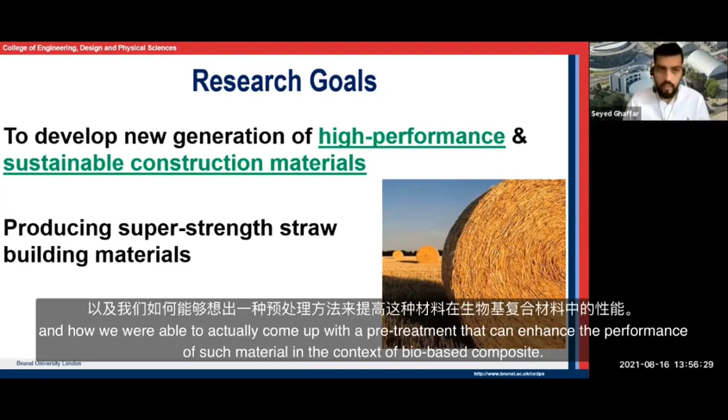A lot of, for example, wheat straw after the harvest of the grain gets left on the field, and after a while it's burnt, which obviously results in a lot of CO2 emissions. What we have done in this project is we have proposed to use the stem of wheat straw for construction materials. I will go into the details of how we managed to utilize such materials and how we were able to come up with a pre-treatment that can enhance the performance of such material in the context of bio-based composites.

So these are just some of my main motivations. Of course this is known to everyone - these are the headlines that actually showcase the significance of my research efforts. We have high global demands for energy, unstable and uncertain petroleum sources, concerns over climate change, of course global warming. With the latest reports we saw last week, there are many pressing issues, and it is now past the emergency - everybody needs to play their part in changing their attitude and hopefully coming up with a mitigation plan to the concerns and changes to the climate that we are experiencing now. Obviously the main underpinning reason for all of these challenges is overpopulation and the lack of control that we've had throughout the past centuries.

That then leads to air pollution. With globalization and overpopulation, we are using a lot of our natural resources, so we have a crisis there. At the same time, we are producing an excessive amount of waste, whether that's coming from municipal solid waste or from our industry, construction and demolition waste. So these are just some of the main headlines showing the motivation for such research, and why we need to move towards investing time and research in utilizing our natural resources, and how we can go back and help construct with them.

I want to give an example of what we did back in 2013 on a project called Grow2Build - this was 6 years ago now. This project was funded by ERDF, the European Regional Development Fund, and we were basically focusing on the transition of the Northwest European economy from an oil-based economy towards a bio-based economy. How can we encourage, for example, more farmers to grow hemp and flax and wheat straw, and show them that there is a way of making a building product out of these crops.

We tried to tackle the whole supply chain in this project, from the farmers all the way to the processing partners, the stakeholders, composite making partners - the companies using these fibers and putting them in the form of a building block, for instance - and how we can make sure that they are talking to each other, communicating their needs and requirements, so that we can have a perfect solution to transition the European economy from an oil-based to a bio-based economy.

And I have to say that it was a successful project. We are looking to expand on the outcomes, and we have expanded on what we learned during that project.

We had 11 European partners from Northwest European countries, the likes of Netherlands, Belgium, France, and obviously a couple of partners in the United Kingdom where we are from and I am from. So at Brunel, my university, we were actually in charge of dissemination of such knowledge, and we were also in charge of technical development of these bio-based building products.

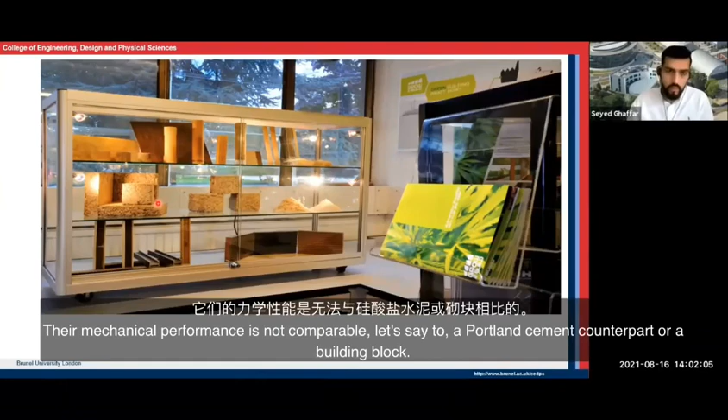...comparable, let's say, to obviously a Portland cement counterpart or building block. But of course, we can reinforce them. We can use them for non-load bearing applications.

And here, for instance, you are looking at another product that we developed called WPC, wood plastic composite. The wood waste is from furniture.

And we also used polymers that have been recycled, the likes of PP, polypropylene, polyethylene, and some recycled PVC, polyvinyl chloride. This darker color here has some waste tire rubber, so shredded tire rubber.

We used this in a process called extrusion at high temperatures, 190 to 200 degrees Celsius. The profiles that you can see here can be used for decking, external decking.

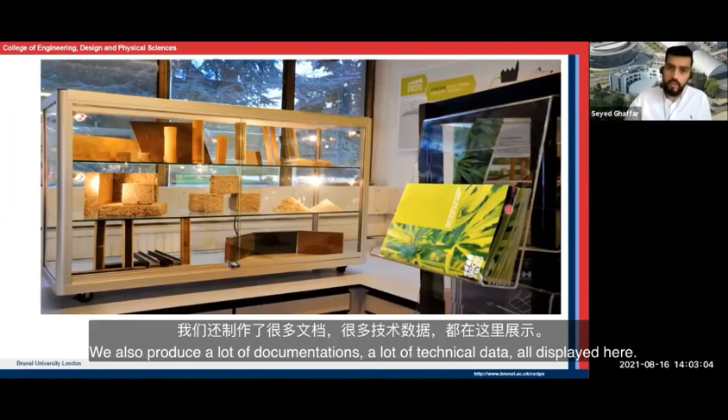We also produce a lot of documentation, a lot of technical data displayed here. We display them for all the small and medium enterprises, all the architects who are willing to learn more about these options and alternative solutions.

They come into us, to our European Center of Excellence, and we exchange our knowledge, and we tend to do a lot of consultations on their request and on their product developments.

We also tend to have a lot of conferences and workshops where we meet technical directors of different companies who are interested in investing in bio-based building products.

We also have a lot of raw materials on display. These are some hemp chips, flax fibers, wheat straw, and we have all the technical specifications and characteristics of these fibers.

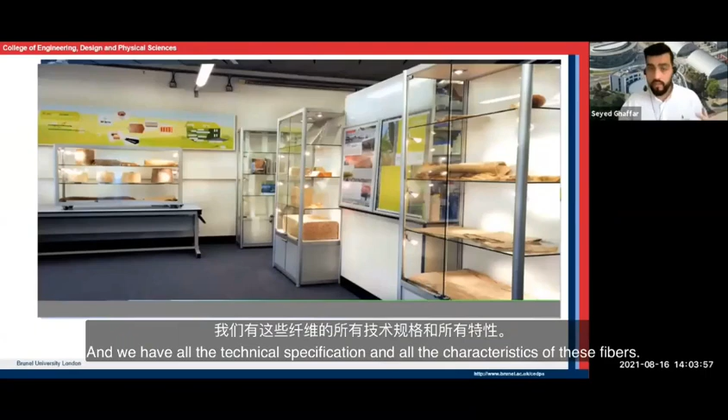Things like chemical composition, mechanical strength, and all the important critical parameters that somebody trying to develop a product needs to know before they design a formulation, and after testing, achieve the required performance and properties.

So for example, you are looking at hemp chips. Different types of hemp chips are available at Grow2Build in our European Center of Excellence, and as I said, we have all their technical specifications.

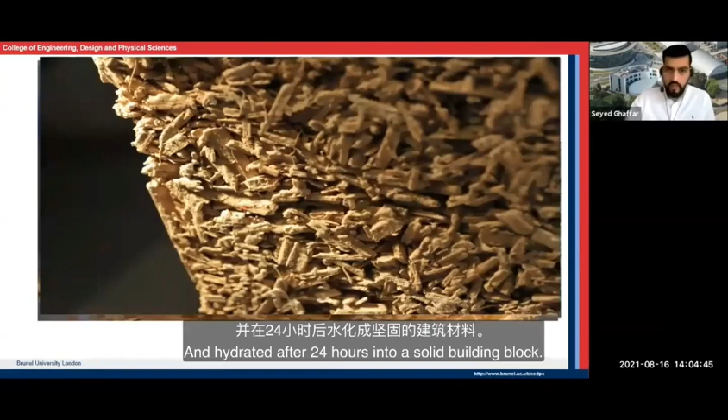Again, this is another close-up of a hemp chip. This is a picture of hempcrete, the hemp chip that has been combined and mixed with lime, and hydrated after 24 hours into a solid building block.

Some straws, wheat straws in this case, which is obviously the main topic of today. We looked at the material science of wheat straw and how we can identify the good parts within these stems.

These good parts are useful for withstanding high structural loads in a context of bio-based composite. You can see some other examples of the products that we have developed.

So let's go to discuss the wheat straw composite, which is really the main topic of today's session. If you're interested, I will make all these presentations as slides available to you, so you can read what my group has done already around this topic.

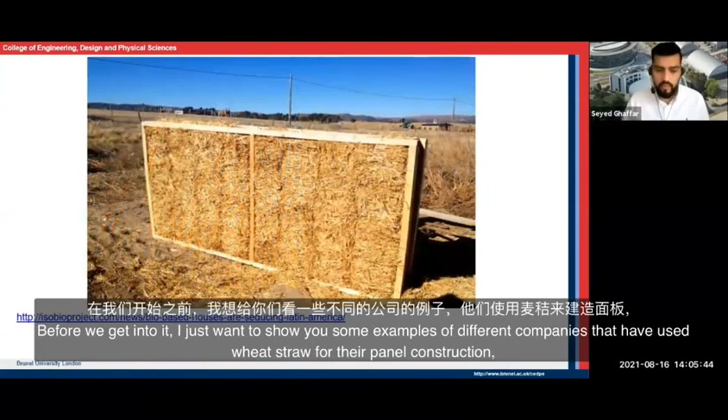Before we get into it, I just want to show you some examples of different companies that have used wheat straw for their panel construction.

But one thing that I want you to realize is that they do not use any pre-treatment, they do not use any material science. They just get the wheat straw with minimum processing, without any separation, without any cleaning.

Without any purification, they just use it in a cassette, as you can see in the picture, and they put it in use. Obviously, their durability then is an issue.

Their mechanical performance is another issue. But this is how they utilize wheat straw without any pre-treatments, without any optimization.

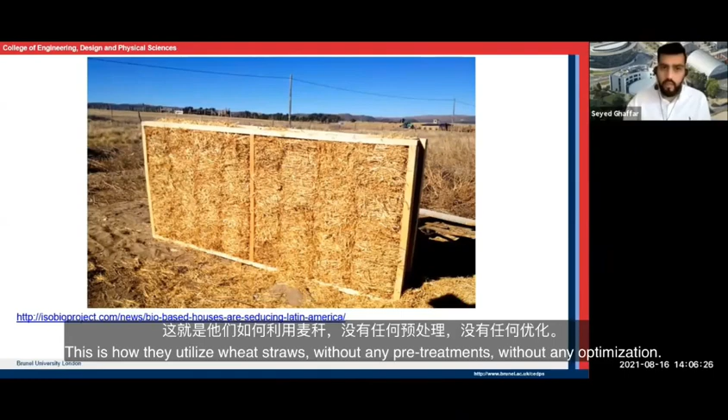And I will tell you why this is wrong, and why this will not be a good solution in the long term and at a large scale. These are only one or two examples of the projects that they have done, and it might not be suitable or feasible for industrial upscaling.

So you can see some more pictures here of this company. The link is here, and the company is called EcoPanel. And this is their information. They are based in Czech Republic.

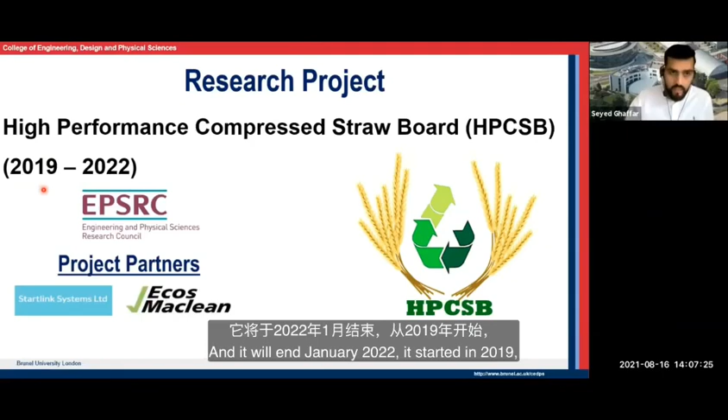So a little bit more about my project, high performance compressed straw boards. We got sponsorship from EPSRC, the Engineering and Physical Sciences Research Council. I have two industrial partners on this project, and it will end January 2022. It started in 2019. So today I will talk to you about the outcomes of what we have found out from this investment, from this project.

The main focus is on biorefinery of wheat straw. The process of biorefinery is sustainable processing of straw biomass into a spectrum of marketable products and energy, such as heat, power, fuels, chemicals, and also some materials and products that we can extract from this straw biomass. So there needs to be a biorefinery process: a pre-treatment stage, then processing and optimization before we can achieve an array of different products and energies useful for our sustainable development.

So the target is on low volume, high value products, in addition to high volume, low value products like bioethanol, which is a fairly established area of research and development. It has already been developed, and they have very high TRLs, technology readiness levels are quite high. And I know a lot of companies who are actually using bioethanol coming from straw biomass or from wood.

So our target was on materials, and how we can get from straw biomass, through a biorefinery process, a material that can be served for the construction industry.

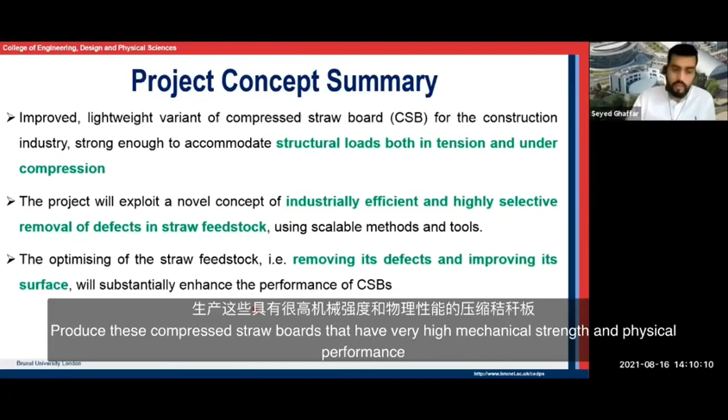And once we have done the optimization, once we have such a removing mechanism of defects, we can improve the surface quality of the straw, because when it comes to biocomposite, I explained why the surface is such an important element for achieving high mechanical strength. So these are what we are trying to target, what we have tried to achieve, and I am pleased to say that we are now able to produce these compressed straw boards that have very high mechanical strength and physical performance. Their water absorption, for instance, is very good, and it passes all the different types of standards.

This is the project concept diagram. We are looking at a modular system, so we want to focus on small scale modular blocks for prefabricated construction.

The company, the project partner who is contributing to this project, is giving us their truss. You can see in the presentation that the company name is Startlink, and they have developed these types of trusses that our compressed straw board, our panels, will actually fit in the middle of. These will help us to have higher mechanical strength, especially in tension.

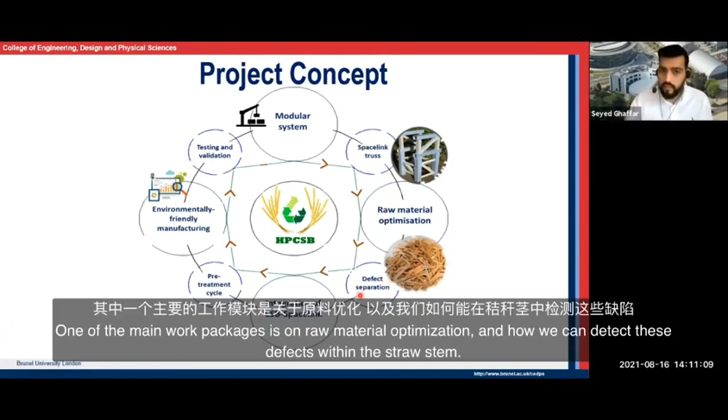One of the main work packages is on raw material optimization and how we can detect these defects within the straw stem. Then we integrate the compressed straw board with the SpaceLink solution. The pre-treatment cycle is extremely important, and we have to adopt a strategy which is environmentally friendly. And after that is comprehensive testing and validation of our solution.

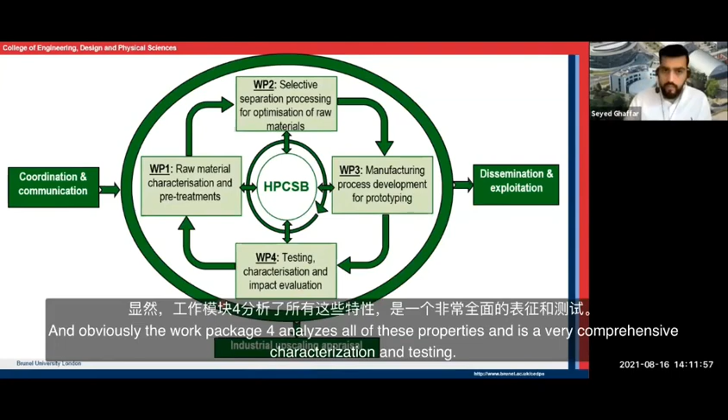This diagram here shows the details of the work packages. It starts from raw material characterization. Then the outcome of this work package was fed into work package 2, which is selective separation and processing for the optimization of the materials. Then work package 3 looks at manufacturing process development for prototyping. And obviously the work package 4 analyzes all of these properties, a very comprehensive characterization and testing, in order to evaluate the impact and see if we can produce the system and solution on an industrially feasible scale.

So we wanted to use eco-sustainable strategies. We knew that the wheat straw as it comes is not strong enough. It needs some type of pretreatment, and our pretreatment is a combination of physical methods, very mild physical methods. We do not use any chemical pretreatments, and we do not use any coupling agents.

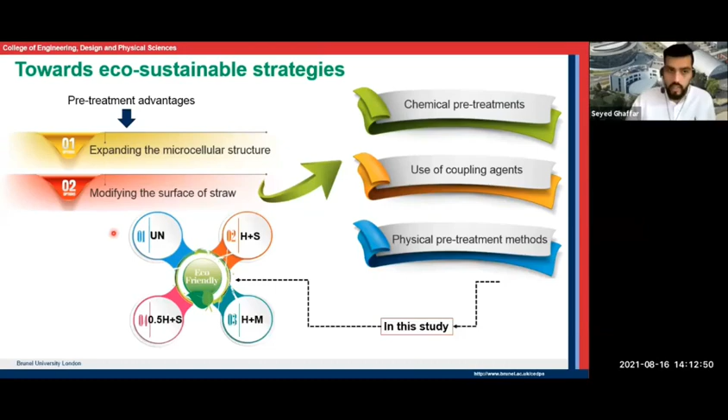We just use a couple of pretreatments, a combination of physical pretreatments such as hot water washing, steam pretreatment, and for the reasons of comparison, we also use microwave and hot water. UN here stands for untreated straw. So we wanted to get the full picture of what happens to this straw once it is undergoing these different types of physical pretreatments, for us to find out if we can actually enhance the performance of these straws compared to an untreated sample, untreated wheat straw as received from the farm.

So we had to look at the wheat straw in detail. So this is the wheat straw stem. Obviously the grain goes for food purposes. Then you are left with a stem, and the stem has two different main components. One of them is called internode, and the other one is called nodes. So here you can look at the nodes. This is as received from the farm.

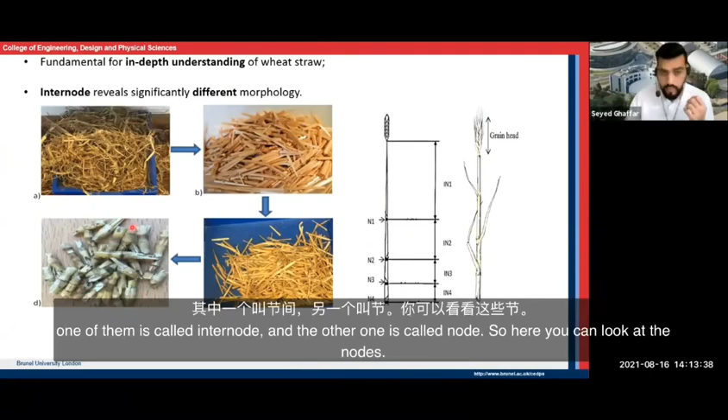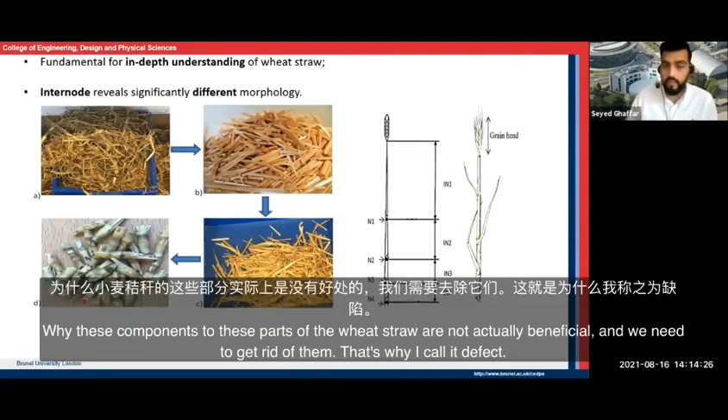Then we cleaned all the straw biomass. We got rid of all the leaves, and we were left with a stem. The stem is this part here. Then the next stage, we separated the internode from the nodes. So the nodes are the joints, they act as a joint in the column. In the context of biocomposite, we later found out that they are a defect. They are potential routes for cracks in composite once they are under loading. I will prove it to you within the next few slides, why these parts of the wheat straw are not actually beneficial, and we need to get rid of them. That's why I call it a defect.

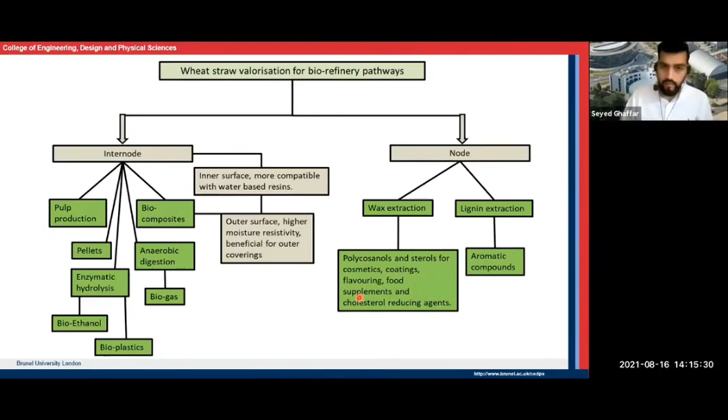But nodes, on the other hand, have their own applications. They can be used for lignin extraction and for wax extraction, which can be used as cholesterol reducing agents, flavorings, food supplements, and even cosmetics. And because the node has a higher content of lignin, we can use these nodes for lignin extraction and aromatic compounds, chemical compounds that have their own application.

But one thing I want to emphasize here is that we should not use the whole wheat straw as it comes from the farm. There needs to be a separation. There needs to be a careful characterization between node and internode and what they could be used for. This is a smart way of biorefinery.

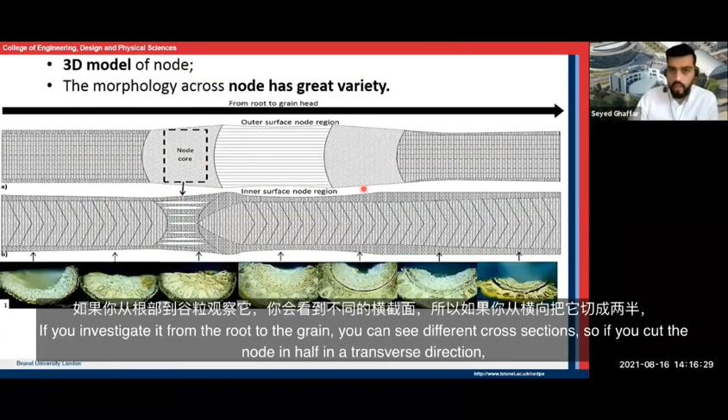So in our study, we looked at the morphology and how the different parts of the straw are different. So this is node in transverse direction. If you investigate it from the root to the grain, you can see different cross sections. If you cut the node in half in a transverse direction, the morphology of the cross section actually changes. You can see it is initially hollow, then it becomes dense, it becomes very completely filled up, and then you have a very dense core material here at the center of the node.

And then later on is the initiation of the upper internode, which is again hollow and doesn't have any dense areas. I can show you in the next picture here. So you are looking at the cross-section of internode, and you can see it only has one layer of epidermis, parenchyma, and vascular bundles, and is generally hollow. It has a hollow structure.

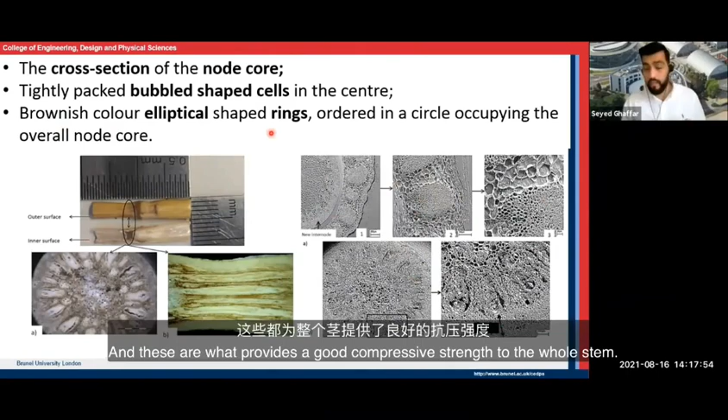Again, here it compares the cross sections of nodes in transverse direction. So this is the whole node area, cut in the middle in a transverse direction. You have the inner surface and the outer surface, and these are the optical microscopy images showing the cross section of the node area. And these are some scanning electron microscopy images of the different parts of the node, which is characterized by brownish colored elliptical shaped rings, and these are what provide good compressive strength to the whole stem.

I also looked at the chemical functional groups on the surface in order to understand the chemistry of wheat straw. We looked at FTIR, so what type of chemical agents or chemical characteristics we have on the node and internode. We found out that wax is an important element on the outer surface, and wax is a hydrophobic element.

So if you want to use wheat straw in a context of biocomposite, you need to have a surface that can allow the resin to penetrate inside. But we have an extensive amount of wax on the surface, which diminishes the penetration of resin into the stem. So therefore, we will have a very low mechanical strength. We will have a very low wettability, which is an important element when it comes to biocomposite production.

We also had a lot of silicon oxide and silicon carbide in different wavelengths on the outer surface of node and internode, and they are also characteristics of lignin and other chemical components of wheat straw.

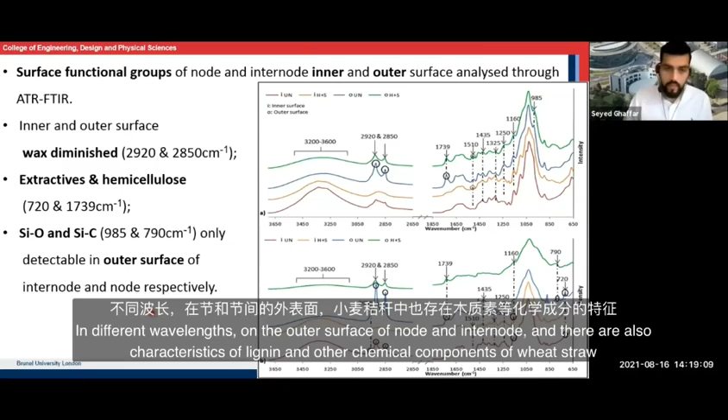We compared the morphology of node and internode, and epidermis, which is on the outer surface, contains the most amount of wax. And as I showed you, the wax has its own application, but in the context of biocomposite it is actually a defect. We do not wish to have any wax on the outer surface because it inhibits a strong interfacial bonding with the resin system.

So you can see that the epidermis is a lot thicker in the node, and that's one of the reasons why we have to separate the node from internode, because the node in a context of biocomposite acts as a defect.

Excuse me. And we also looked at the tensile test of single straw strands for node and internode. We tested untreated straw, and you can see that the tensile strength for internode is around 66 MPa with a coefficient of variance of 10%. The H plus S, which is 30 minutes of hot water washing plus 30 minutes of a steam pretreatment, actually improves the tensile strength, from 66 MPa to 88.9 MPa for the case of internode. So these are the internodes.

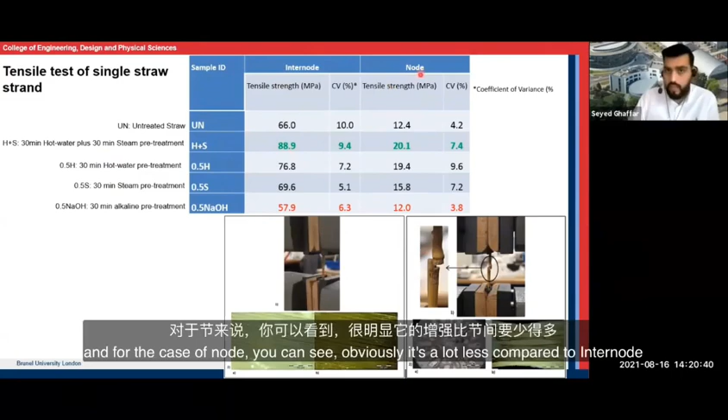And for the case of node, you can see obviously it is a lot less compared to internode. And again, another additional reason why the node is a defect in the context of biocomposite. We cannot have such huge differences in a raw material for biocomposite production. All of the materials that go into the biocomposite need to have high tensile strength, which is one of the most important properties for a raw material that goes into biocomposite application.

So again, another additional reason why the nodes have to be separated and removed before we produce the biocomposites. You can see all the different results for different pretreatments. And when you compare them to internode, you can see that they are significantly lower. The nodes are not supposed to provide that tensile strength.

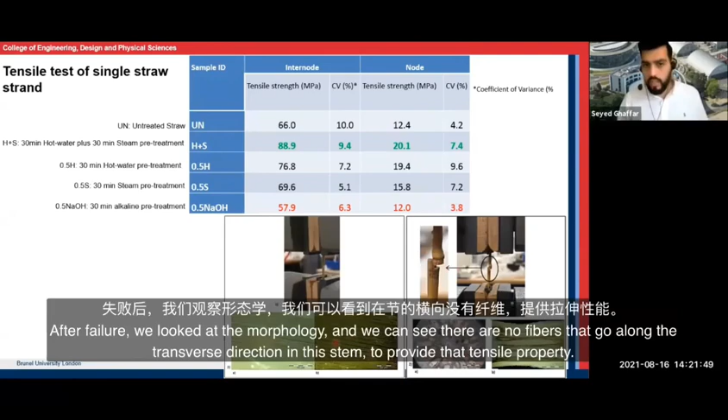You can see here that after failure, we looked at the morphology of the node, and we can see there are no fibers that go along the transverse direction in the stem to provide that tensile property. This is an optical microscopy that shows a lot of microfibers that are situated longitudinally within the internode. And this is the reason why we have such a high tensile strength in the internode, because we have these microfibers that are present.

But the node morphology does not have any fibers, so they are not supposed to be strong in tension. They are supposed to be strong in compression. So for the context of biocomposite, we need to remove these elements because they have very low tensile strength.

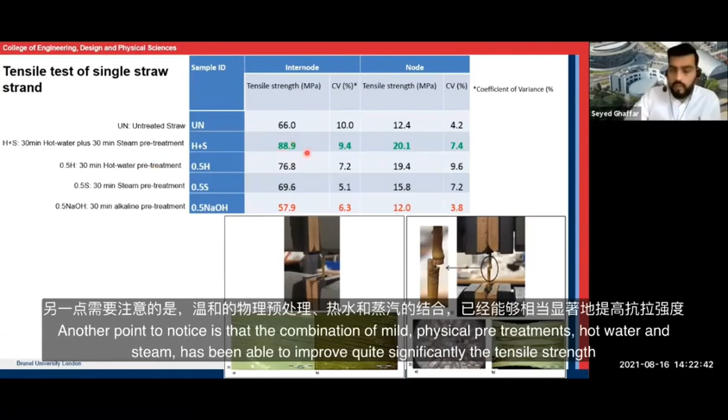Another point to notice here is that the combination of mild physical pretreatments, hot water and steam, has been able to improve quite significantly the tensile strength. Half an hour of hot water pretreatment on its own does increase the tensile strength, from 66 to 76, but it's not as effective as when that treatment is combined with steam treatment. The steam treatment on its own cannot really achieve a good improvement, from 66 to 69, which is not significant at all.

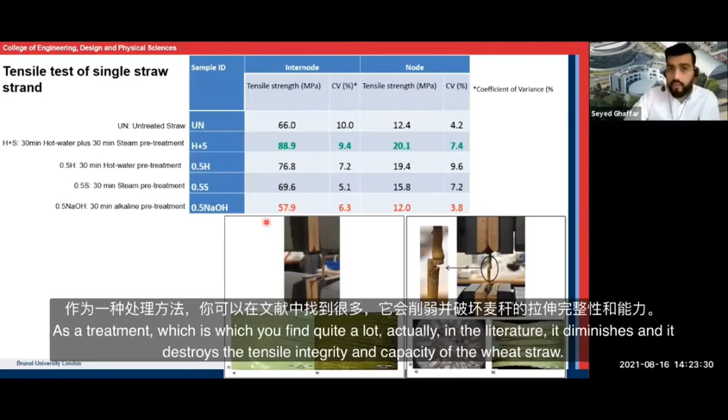Another interesting finding was that the bleaching or sodium hydroxide treatment, which you find quite a lot in the literature, destroys the tensile integrity and capacity of the wheat straw, from 66 untreated to 57.9. So we also proved that the chemical pretreatments that are quite usual within this research area, especially for the pulp and paper industry, are not effective at all when it comes to biocomposite production.

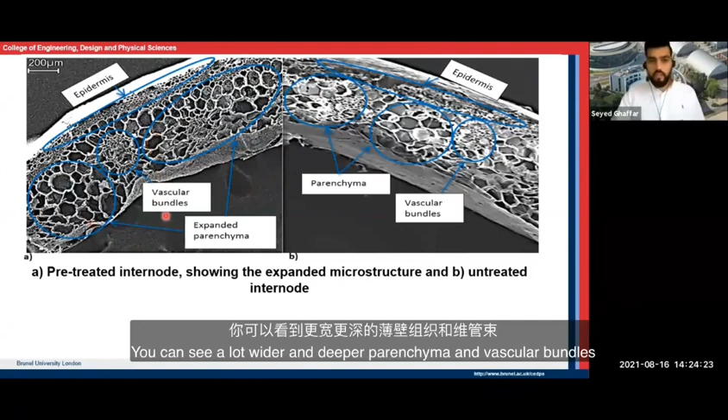So you can see here that the steam treatment swells the cell wall and creates microsites for penetration of resin. And here you can see the comparison between a pre-treated sample cross-section and an untreated sample. You can see a lot wider and deeper parenchyma and vascular bundles, which basically means once the resin is added to the system, the resin can easily penetrate deeper inside the structure of wheat straw.

Therefore, upon solidification, once you produce the biocomposite, once it is solidified, you have a lot higher mechanical entanglement between each particle, between each wheat straw. Whereas in the case of untreated, you can see that the situation is quite different. They are still very tightly packed together. The parenchyma or the vascular bundles, they do not really show that depth within themselves.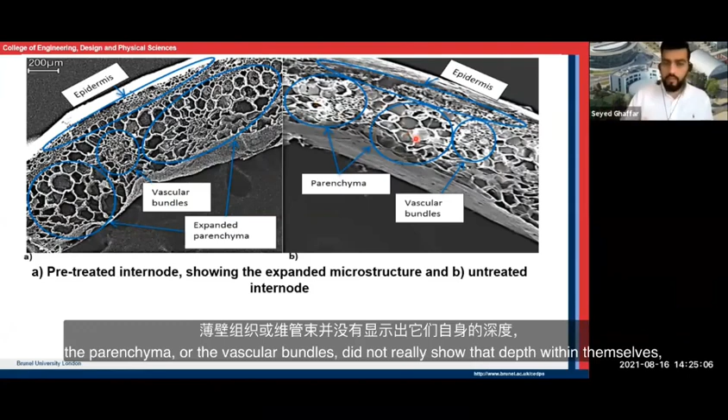So the pre-treatment is quite effective in opening up the pores and expanding them so that they are ready to receive the resin and to absorb the resin. So therefore we can produce high strength biocomposites.

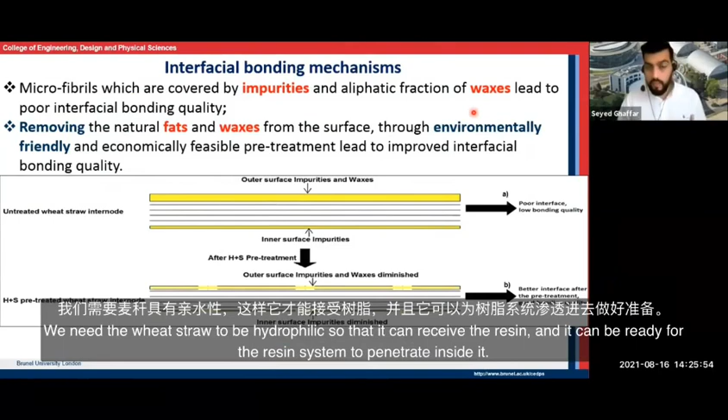Now, moving on to the interfacial bonding mechanism. So far we just looked at the cross section, the microstructure, but what about the surface of wheat straw? The surface of wheat straw is also quite important. We need to get rid of all the impurities and the waxes because wax is a hydrophobic element. We need the straw to be hydrophilic so that it can receive the resin and it can be ready for the resin system to penetrate inside it.

So through our pre-treatment, which was hot water followed by steam, we were able to firstly diminish the layers of wax, clean it from all the impurities, all the natural fats, and also open up some pores for the resin system to penetrate inside. This type of straw raw material is perfect for better interfacial performance and interfacial bonding quality compared to the untreated one. So this is an untreated straw which has a high amount of impurities and waxes on the outer surface. But after the pre-treatment, we have been able to remove and diminish the wax and also open up some micro sites on the surface so that the resin can easily penetrate inside.

We also did some testing on a small scale to look at the failure mechanism. You can see here in figure A, the failure that we call adhesive failure. So there are two wheat straw systems that have been glued together using lignin-based adhesive, a thermoset resin. This type of bonding usually has very low mechanical strength because the failure has happened between the resin and the substrate. Then we have B, which we call the cohesive failure. So the failure has happened within the resin system. But there is a good bonding between the resin itself and the substrate, the wheat straw. You can see here some of the wheat straw component is still intact with the resin.

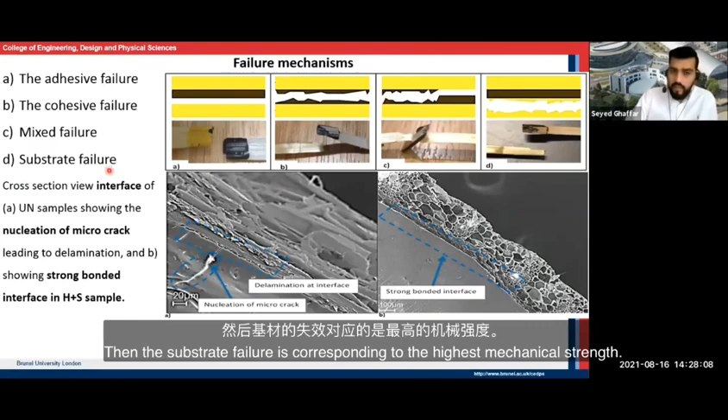Then we have C, which is a mixed failure. So you have adhesive failure at the beginning here. Then you have the cohesive failure, within the matrix system, within the resin system. Then the substrate failure corresponds to the highest mechanical strength. Why? Because the interface between the resin and the straw is so strong that the failure has happened within the wheat straw itself. So there is a lot higher stress required to break this sample, and therefore we have higher mechanical strength.

So when does this type of failure happen? In the case of pre-treated straw. When we wash the straw for half an hour with hot water and then we dry it for another half an hour using high pressure steam. That's when we have very good interfacial bonding.

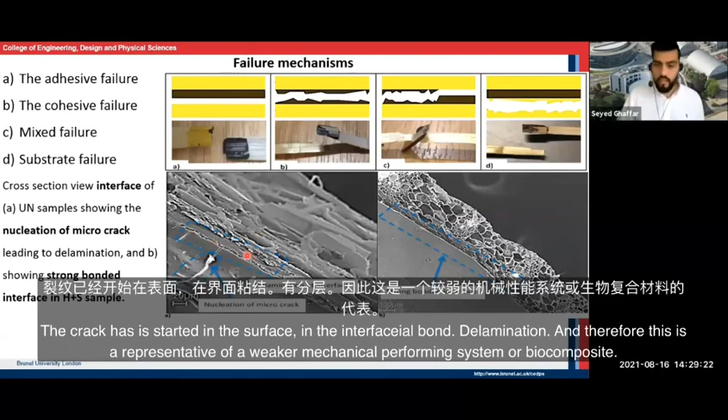And you can see here microstructure analysis, the SEM images that show the interface between the wheat straw and the resin. No delamination at all in the surface and very good intimate bonding. This figure here, on the other hand, is showing the untreated wheat straw and the resin system. So you can see the crack has started in the surface and the interfacial bond, delamination, and therefore this is representative of a weaker mechanical performing biocomposite.

Again, here are some more images that show the failure of a high strength biocomposite. So for the straw that has been pre-treated, we have evidence after the failure. We looked at the microstructure, and we have evidence of resin penetrating inside the microstructure, inside the parenchyma and the expanded cells. And you can look at the optical microscopy images.

They are useful because obviously they are in color, and you can see that the darker brownish resin, thermoset resin, has fully penetrated inside the cells of wheat straw. So the yellow component here is obviously wheat straw, and the darker component is the resin system. And in a closer look, you can see that the resin has been able to fully penetrate inside the straw.

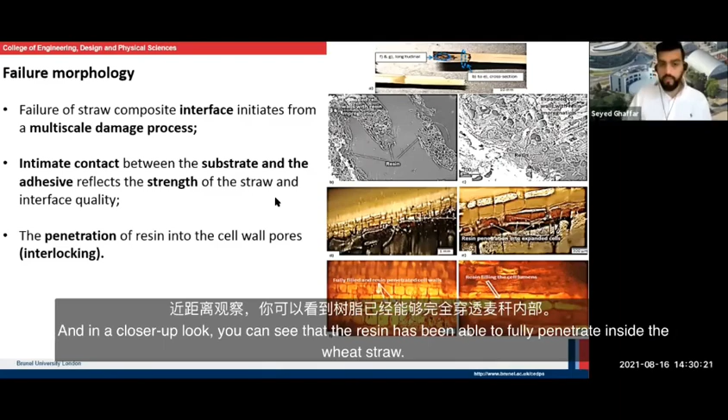So here I have another study to present to you based on our project. We looked at the bio-based polylactic acid composites. We wanted to come up with a way of improving the mechanical strength. So if you're interested, you can read the whole paper, but I just show you the main results here. We used hot press in order to make our sample.

So we combined PLA pellets, which is polylactic acid, with shredded wheat straw. And we hot press it at high temperatures for around 10 minutes, and we use a temperature of 185 to 190. We cut the strips of sample for tensile performance assessments. And you can see the results here.

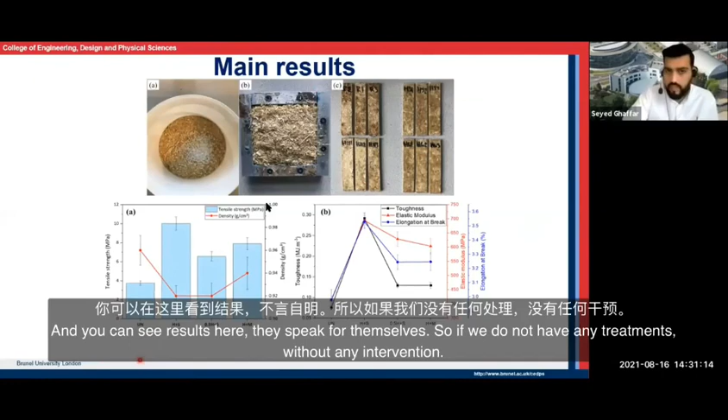They speak for themselves. So if we do not have any treatment, without any intervention, we use the wheat straw as received from the farm, and we make the composite out of it. You can see that the tensile strength is only around 4 megapascals. But if we do have that intervention, if we have a very mild physical treatment on the straw before making the composite, this mechanical strength increases quite significantly from around 4 MPa to around 10 MPa.

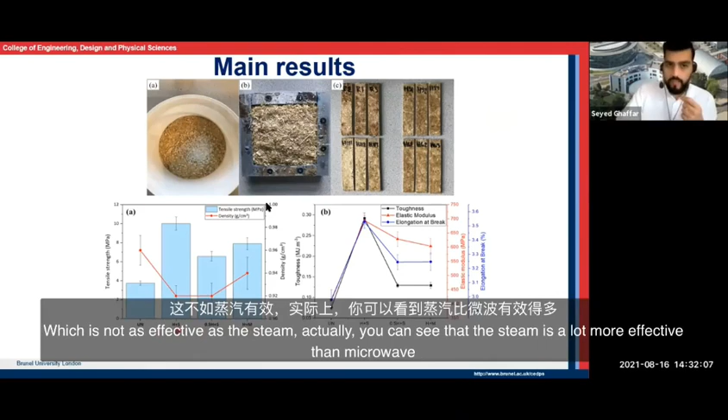This is showing the results for only half an hour of hot water followed by steam. This is for 1 hour of hot water followed by steam. And this is hot water and microwave. Actually, we wanted to see the effect of microwave in expansion of the cell walls, which is not as effective as the steam. You can see that the steam is a lot more effective than microwave. And here you can see the toughness and elongation at break. If you're interested, you can look at the details of our paper.

So in order to conclude, sustainable materials do need a detailed investigation before we can use them and before we can get the best performance out of them. It is a very fairy tale story to just say, we have a bio-based material, we have a natural resource, let's just put it in a biocomposite or a building block and implement it throughout the construction industry.

That doesn't work. We really need to study the details, specific material science behavior in order to be able to identify the drawbacks, identify the defects. Once we understand their behavior, once we understand their defects, we can build on it. We can improve them and use them for a building product. So pre-treatments are essential.

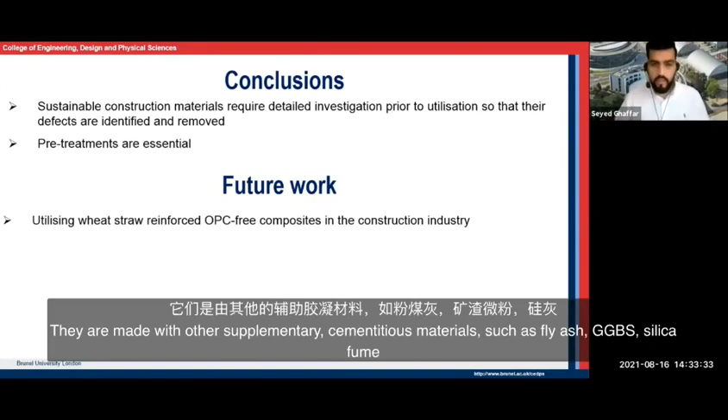In terms of future work, we are now using wheat straw as a reinforcing agent in alkali activated materials. So we don't have any ordinary Portland cement. They are made with other supplementary cementitious materials such as fly ash, GGBS, silica fume, and we want to use these wheat straw in order to see if they have the good reinforcing effect.

So as I said, we are focusing on alkali activated materials or geopolymers. The main area of our focus is on eco-friendly hybrid pre-treatment in order to improve the surface. We are going to use some nanomaterials to functionalize the surface in order for these wheat straw to have a better reinforcing capacity when they are served in the context of low carbon binders. We're not using any Portland cement, so low carbon binders with low carbon reinforcing agents can tell a very good story, and hopefully you can read the results of that paper once it is fully published.